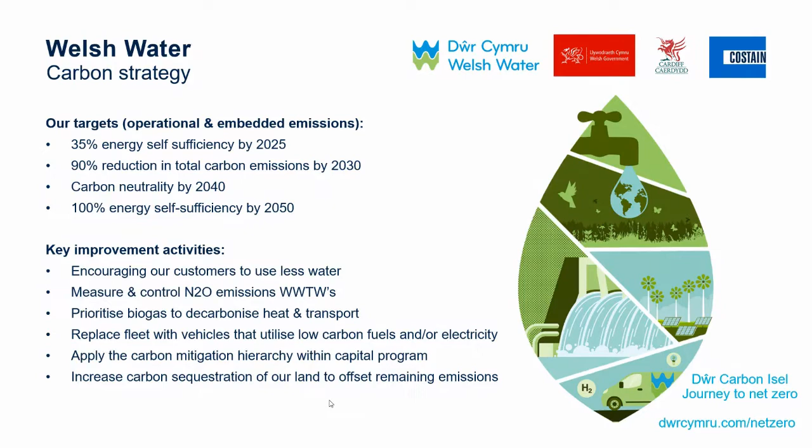For more information on our carbon strategy, head over to our Welsh Water site at dwrcymru.com/netzero, where you can find more information on how we plan to tackle our emissions. Can you move over to the next slide?

Within our journey to net zero, we have a couple of key strategic principles, building on all the work we've done to date, which has achieved a 65% reduction in our total carbon emissions since 2010.

Firstly, we want to continue the good work we've already been doing on reducing energy consumption, increasing self-generation, and sourcing remaining electricity from Welsh-based renewable generators, particularly ones that are REGO-backed and from a credible source. Secondly, prioritize the use of sewage-derived biogas to decarbonise heat and transport, rather than using it to generate renewable electricity, as it has a 5 times larger decarbonisation impact by 2030.

Now the grid is continuing to decarbonise, we'll gradually replace the existing fleet with vehicles that use either hydrogen, biomethane, and/or electricity. We'll actively control and reduce the fugitive emissions, and we'll need to monitor and reduce the emissions associated with construction activities, which is significant. Welsh Water spends over a 5-year period about £1.5 billion, and a large portion of that is in concrete and steel structures, which have a large carbon emission associated with them.

And then lastly, maximizing the carbon sequestration potential and biodiversity of our land holdings. We're a large landowner in Wales, and we can do more as a company to improve the level of carbon that is removed from the atmosphere from those land holdings, and improve the biodiversity in those areas.

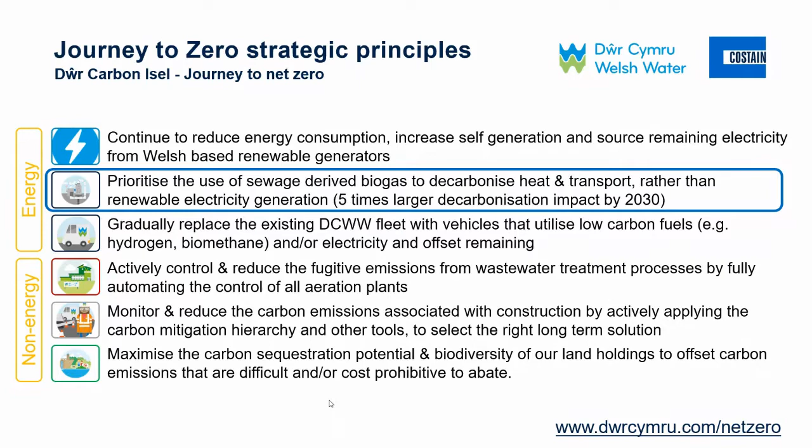We move on to the next slide.

So we worked, probably 18 months to 2 years ago now, with the HyCymru Wales Hydrogen Trade Association. We had a meeting with all kinds of original equipment manufacturers and other stakeholders, and we discussed what we would be able to generate, how much hydrogen we possibly could generate from 35 gigawatt hours of biogas. This is the amount of biogas that was available at that time, and we couldn't utilize the full adequate sludge capacity within one of our treatment works. That was the number which we used to initially conceptualize the idea.

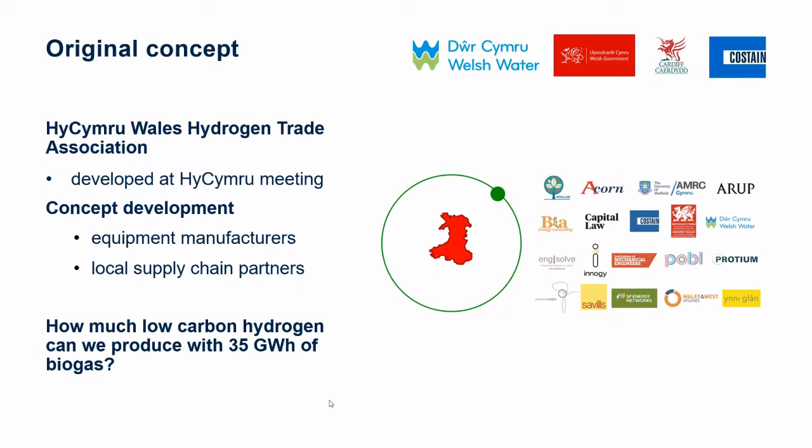And we worked, as said, with original equipment manufacturers like Biotech, Nanosun, and a couple of other companies, but also local supply chain partners to develop this idea further, which also then was supported by Costain and other partners. Move over to the next slide.

So this meeting then turned out to be surprisingly coming out with a larger volume than we thought we would get from 35 gigawatt hours of gas. And we ended up, instead of discussing it initially at one of our sites close to Dinas Powys, relocating the idea to our Cardiff East wastewater treatment works, which treats adequate wastewater for over 1 million population equivalent, and is our largest power consumer within our company.

And using that 35 gigawatt hours of biogas, we came up with the number that we could generate up to 2 tons, or 2,000 kilograms a day, of green hydrogen by using a steam reformation technology. By implementing that at Cardiff wastewater treatment works, we would be able to generate enough hydrogen suitable to supply 100 buses or similar every day.

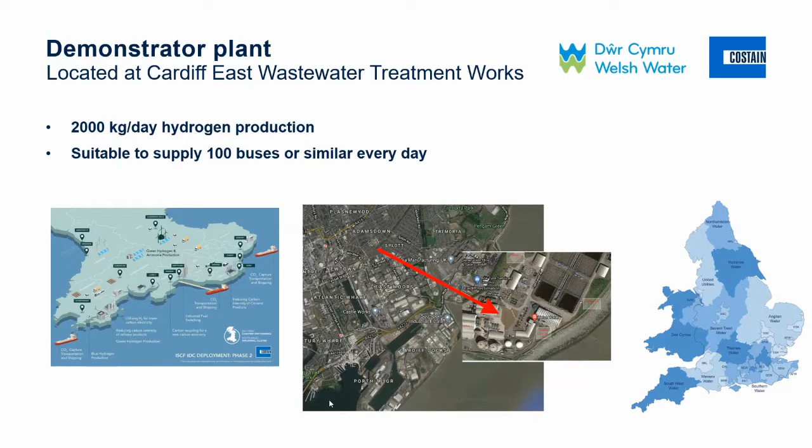And due to the quite good location of the treatment works being in the docks area, quite close to the Viridor waste incinerator, and quite close to the Lamby Way refuse collection vehicle depot, we started to talk with Cardiff Council, particularly on looking at this from a decarbonising refuse collection vehicles angle, but also to enable bus decarbonisation and other forms of transport, including Welsh Water's HGV fleet, which actually ferries sludge around to be treated at the treatment works. So that location at Cardiff is a really good kind of central location.

Now, if you look at the net benefits of this commercial scale demonstrator, we could save well over 9,000 tons of CO2 equivalent, and that is not far off the total transport emissions which we report in scope 1 and scope 3 within our business. So this single investment would make Welsh Water's transport almost virtually net zero. That's a significant impact.

But not only that, we believe that the introduction of using hydrogen to power fuel cell electric vehicles could also reduce a significant amount of PM10s out of the local atmosphere and significantly improve air quality, with close to 140 kilograms per year of PM10 being removed as a result of this project. We also think that it will attract green jobs and attract new businesses to the area and make Wales potentially a hydrogen pioneer alongside the work which has already been done by University of South Wales with their hydrogen centre close to Baglan near Port Talbot.

But there is also potential for rollout of this technology to other Welsh Water sites where we also have advanced anaerobic digestion processes, like the ones near Port Talbot at the Afan treatment works, Cog Moors near Dinas Powys, but also up in North Wales in Wrexham at our Five Fords wastewater treatment works facility.

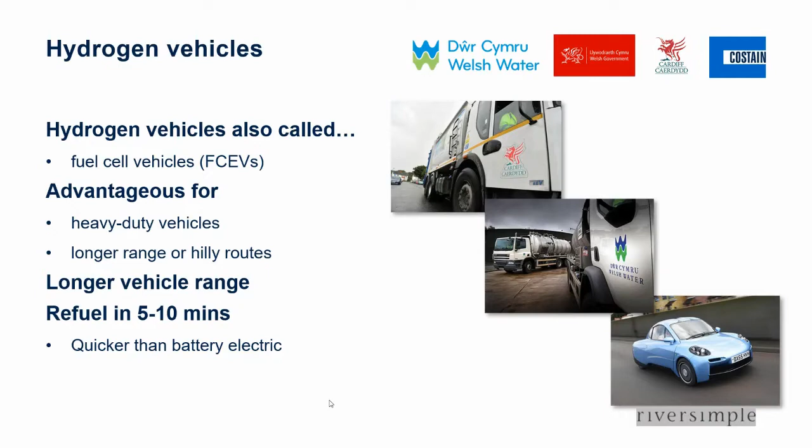Move on to the next one, Gareth.

So, but there also are some key cost challenges. We believe that building the hydrogen facility, which I just suggested at Cardiff, that produces about 2 tons a day or 2,000 kilograms per day or 700 tons per year, enough for 100 buses, is actually commercially viable from the outset and requires relatively little or no subsidies.

What is the challenge here is actually securing the demand for the investment. We in Welsh Water generally tend to work with an investment window for this type of stuff between 5 to 10 years. And we believe we can do that as long as the demand is there. Currently there is not enough demand to justify the investment in the facility.

So what we also tend to do with this project is to stimulate and try to get the supply up and running. And in that, there are some significant cost challenges, because the cost of supplying a hydrogen vehicle is significantly higher than currently an equivalent diesel vehicle.

So it will have higher investment cost that needs to be covered. But the good thing over time is that the operating cost should be lower, and there's also a longer vehicle life expected. So if you do an assessment across the whole life cycle of the vehicle, you should see a significant benefit by going towards this new low carbon technology.

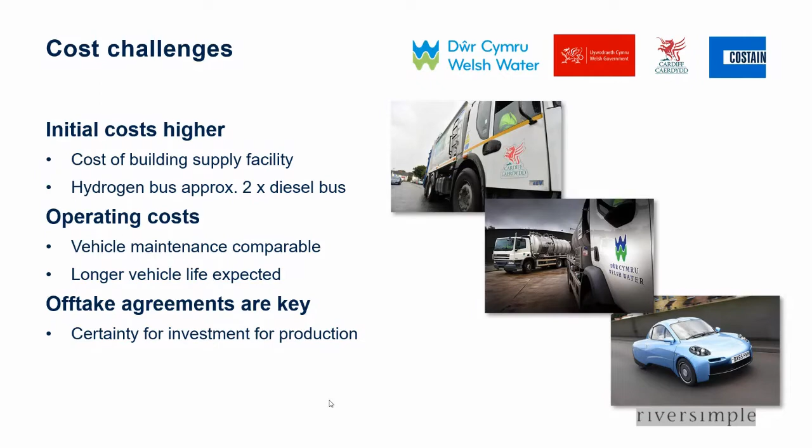But yeah, as Ben was saying, the costs of the vehicles initially are higher, but the operating costs are largely expected to be similar. So with some initial funding to subsidise the initial costs of the vehicles, we feel... like there, Ben. Oh, hello, you're there. Yeah, I'm there still.

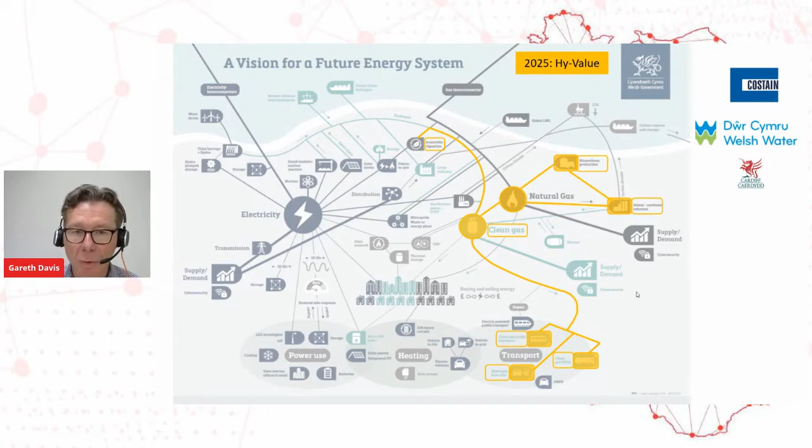So if we just go to the next slide, you can see that by 2025, we think that HyValue, if we're producing hydrogen from biogas and biomethane to provide hydrogen for transport, would cover already quite a significant part of that energy system. And if you look further forward 10 years to blending gas on the gas network, which is currently quite widely expected to happen, then by 2035, you can see the reach of the project, the influence of the project is really quite significant.

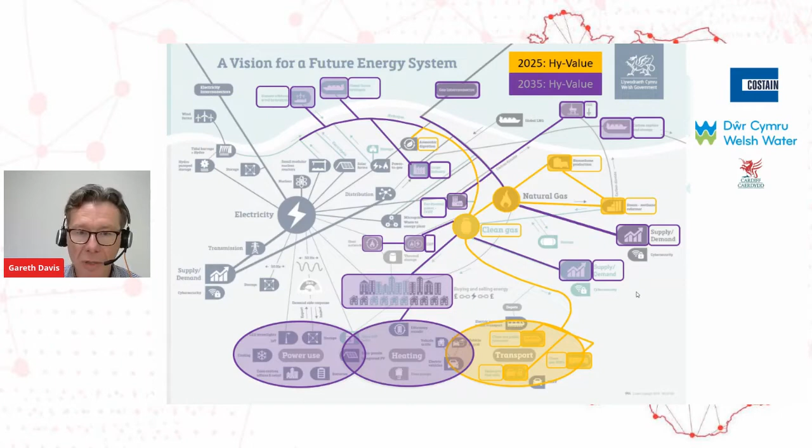And this could be for South Wales, for Wales as a whole, or for the UK. So this is really an important project, potentially, in getting the hydrogen economy kick-started to make a contribution to decarbonisation and to local air quality.

There have been consultations and ambitions published by Welsh Government regarding decarbonisation, and a specific one we picked up in doing this project, because we're looking at transport, was that there's an ambition to have 200 fuel cell electric vehicles. Those are buses basically that are fueled by hydrogen by 2030.

Now that would have an additional cost of around £45 million, because each of those units costs about £225,000 extra compared to a diesel bus. But as the economy is established, the cost of the bus is expected to fall dramatically, and this is a very meaningful way to go about decarbonisation, because buses, particularly those with longer routes, are really well suited to hydrogen.

There's also a high level requirement to think about the infrastructure planning for hydrogen alongside battery electric. A lot of the news is about battery electric at the moment for vehicles, and obviously it is a number of years, 3 or 4 years ahead of hydrogen as a technology, and starting to become mainstream.

But we'd just like to highlight that considering hydrogen now and developing it alongside battery electric means that things that don't seem a problem now won't come to light later. So for instance, if you're converting a fleet to battery electric at the moment, converting only a few vehicles probably wouldn't give you a problem with your electrical connection to the grid, but doing so in the future, when you want to convert the whole fleet to battery electric, could leave you with much bigger costs in terms of bolstering your connection to the electric grid, and could make investments further into the future look really quite unattractive compared to how they look now.

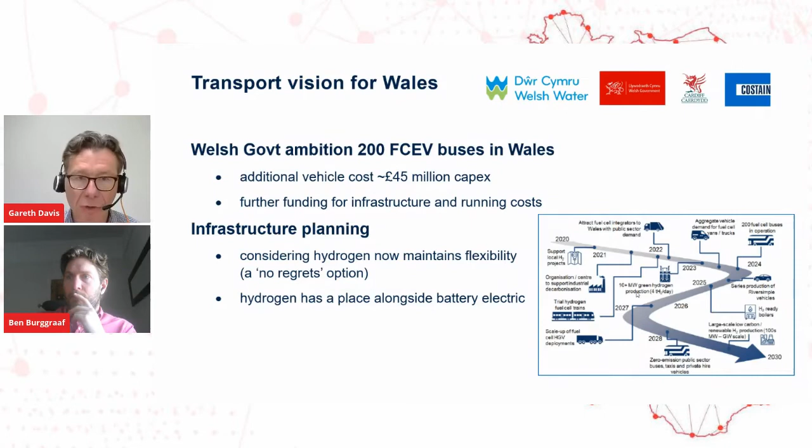So to move to the HyValue scheme, and I'm just aware of time, we're going to have to skim through this quite quickly, but we came up with the strap line, making your poo work for you, and we really like the idea that the waste biogas from the sewage treatment works could produce hydrogen, and as you'll see later on, could be used to fuel the City of Cardiff's vehicles from the local fleet of the Cardiff Council.

Hydrogen's really a good fuel for being an ultra low emission form of transport, because that will make an improvement on public health by having no particulate matter and lower NOx by using fuel cell vehicles.

So we decided we would look initially at refueling primarily for fleet vehicles, but also private vehicles, and come up with a scheme that could basically handle 2,000 kilograms a day of the hydrogen produced from the 35 gigawatt hours a year of biogas that Ben highlighted initially. So 2,000 kilograms a day is roughly enough for 100 buses to operate daily, so it's quite a significant amount this facility could provide.

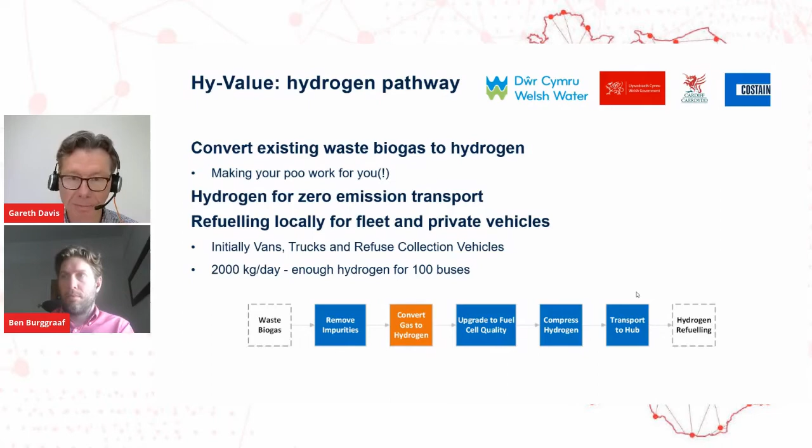I think Ben's already covered this on some of the benefits, but you can see there's a benefit on decarbonisation in terms of reducing CO2 for climate change, and there's a benefit on air quality in terms of the PM10 reduced.

Ben, maybe you'd just like to chip in on this one?

Can you hear me again, Gareth? I'm back again, I can hear you. Good, yeah, I'm more than happy to chip in.

We're looking at the steam reforming of biomethane in this case. Biomethane is made by separating the CO2 from the biogas, and then steam reforming, which also expels CO2. But this CO2 is biogenic because it's short cycle and derived from waste materials, like sewage sludge, which is different to the steam reformation of natural gas, where you're using fossil fuels to decarbonize. We currently inject biomethane to the grid at our Five Fords facility, which has been classed as green gas, and we get green gas certificates, or renewable gas guarantee of origins, which are also ISCC accredited, one of the European standards for accreditation on renewable gas.

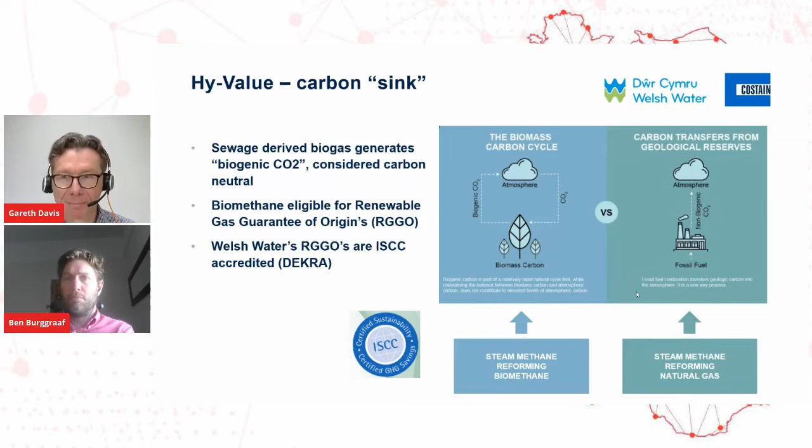A little bit of detail on what the scheme consists of. As Ben said earlier, we've collaborated with technology providers for a range of options for each of these processing steps, which you can see in the diagram at the bottom. We tie in and connect into the existing biogas holder, currently used before generating power at the Cardiff East site, and then we'd upgrade the biogas to remove CO2, water, and other trace components such as sulfurous compounds which could affect the processing. That biomethane then feeds into a modular SMR, a steam methane reformer unit, which would produce 2,000 kilograms a day of hydrogen.

We then produce that hydrogen and store it locally, before using a novel technique to distribute it, from a company called NanoSun, which could enable us to establish more than one fueling facility. It's quite a nice idea - a mobile library type approach, where we could have a facility that visits different areas around South East Wales and South Wales, providing hydrogen on different days of the week.

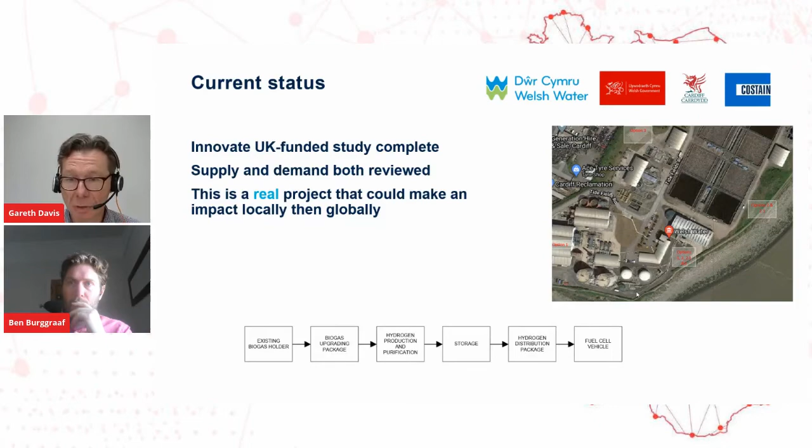In terms of the current status of the project, we've produced a concept design, with a capital cost and an overall program for what a project might look like to fully engineer, design, and construct this facility. We've gone through a feasibility study, part funded by Innovate UK, looking at both the supply and demand side, including the demand side with Cardiff Council. Significantly, this is a real project - there's a lot of movement in the hydrogen space at the moment, a lot of reviews and assessments of what the best thing to do is, but this is actually a real project. Boris Johnson used the term 'oven-ready project' recently, which has become a bit of a buzzword, meaning it's a project that's just ready for investment - viable economically and technically, and we're looking to move it forward as quickly as we possibly can.

Having achieved that financial and technical feasibility, we started to think more deeply about the demand side of hydrogen. Cardiff Council were a really key stakeholder in the initial phase of looking at the HyValue facility, and along with Welsh Water, identified that looking at hydrogen supply and demand at the same time is really key to making progress. A lot of people talk about the chicken and egg problem - you don't get spend on infrastructure because not enough people are buying hydrogen vehicles, and vice versa, people don't buy hydrogen vehicles because there's no nearby supply. So addressing both at the same time was seen as key for this project and for pilots going into the future. We got some good publicity from the BBC website too, which helped promote and highlight what a good project and proposition it is.

Cardiff Council supported us to do a demand assessment, which Costain undertook, looking at overall demand for hydrogen, looking at total cost of ownership, and also funding and procurement options on the demand side. So that means for vehicles, for the infrastructure to provide refueling. So we're now starting to have some joined up thinking, looking at the whole thing as an energy system. If we think back to that initial energy diagram from Welsh Government, a lot of this is about joined up thinking about an integrated system.

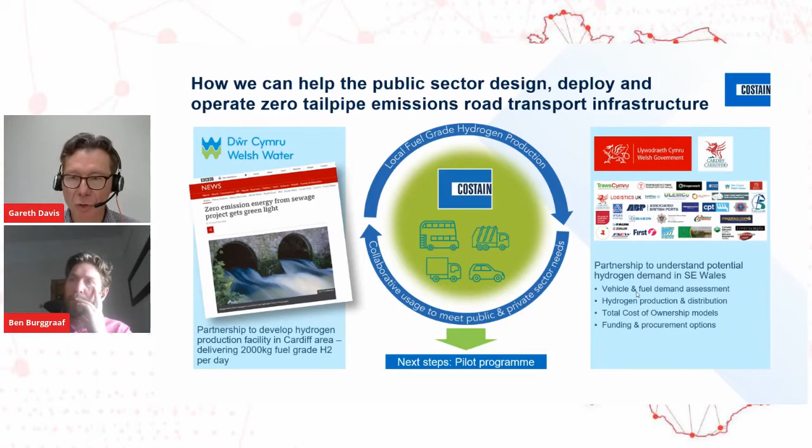So we've just finished producing this report, looking at the feasibility of this low carbon pathway, which is using the renewable biogas available from Dŵr Cymru. We've included a financial assessment of the overall cost of vehicles, and we've identified the customer base and the overall market viability of it. So some of the specific tests we undertook were mapping the potential demand for hydrogen, mainly from fleets.

So we primarily looked at local authority, but we've also spoken to bus operators, we've also spoken to emergency response vehicles, and we've come up with dozens of interviews, online questionnaires, considering different people's opinions, and coming up with a range of scenarios of how much hydrogen could be conceivably consumed in the South East Wales area over the next 10 years.

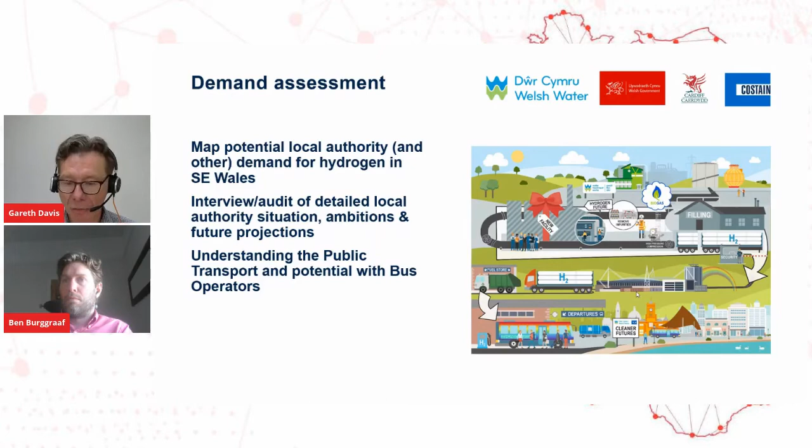As you can see there, we talked to all sorts of different people, ranging from bus companies such as TrawsCymru, First Group and Stagecoach. We talked to University of South Wales, who were key because they were looking to support us through the HyValue project. You can see we've got a range of not just bus companies, taxi companies, all the emergency response companies, fire and rescue, police. So we spoke to a wide range of people, most of them with a fleet operation.

One of the attractions of fleets is obviously you can talk to relatively few people, but have the influence over a relatively large number of vehicles. So we developed 3 scenarios. I won't go through them in too much detail, but obviously they were varying in levels of optimism, from scenario 1, where there's pretty free funding and availability of hydrogen or fuel cell electric vehicles, FCEVs, down to scenario 3, which is a less optimistic but perhaps more pragmatic view of how things might develop.

Interestingly, with the work, we expected to find quite a lot of potential use from buses, and we saw bus companies expecting somewhere between 40 and 50% of buses in future to be powered by hydrogen. We saw refuse collection vehicles, bin lorries - you can see in the middle picture there - they were a very strong case for conversion to hydrogen because of the power use, because of all the hydraulic equipment on board the vehicle, and also the fact that you tend to want a long shift pattern and don't want to be charging a battery electric bin lorry for a number of hours during the day. You want them out on the road.

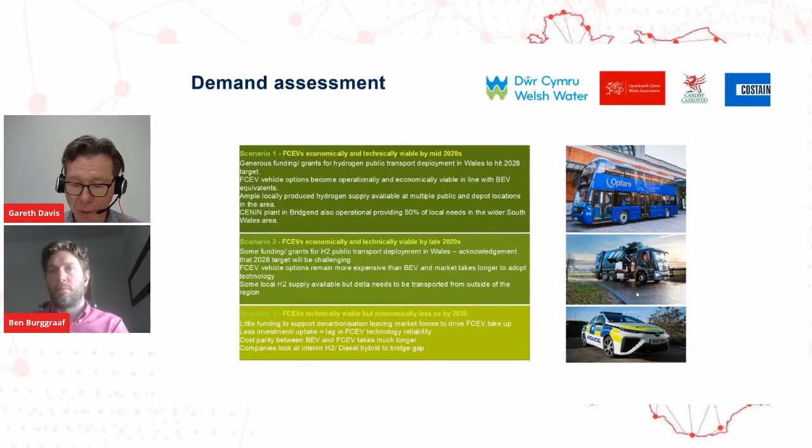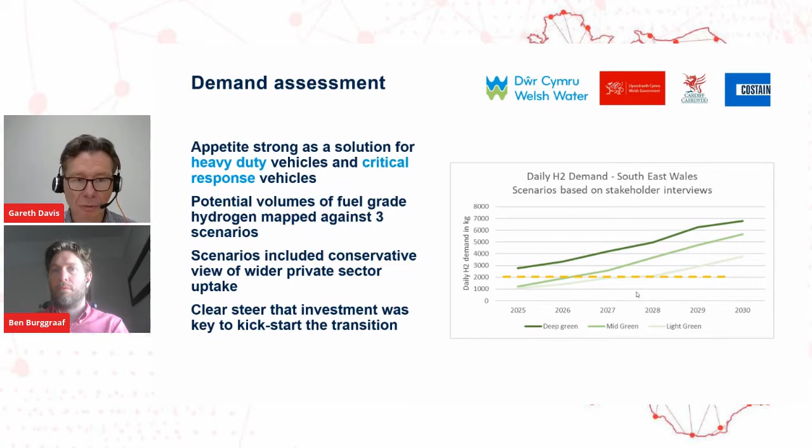So the conclusions of that report were that the hydrogen supply scheme has been shown to be viable technically and financially, and we've shown some benefits of the potential for hydrogen demand in South Wales through actively talking to the operators of fleets in the area. And there's proven that there really is a need to develop hydrogen alongside battery electric, both from the supply side and demand and refueling side.

And obviously funding for this is going to be absolutely critical. And I'll just pass back over to Ben, maybe to talk through the overview of how we see things going in the subsequent years.

So I think this slide provides a good overview of what we're planning to do next. Hopefully you can still hear me, so there's a bit of a glitch.

We currently have undertaken a feasibility study. We've also had conversations with stakeholders on the design of a trial, and we have been engaging quite heavily with fleet managers, as Gareth already has been indicating. But I think what it really shows is that this kind of project cannot be a standalone project. We cannot look at the production of hydrogen on a standalone basis. We need to look alongside the demand in order to secure further investment in this particular area.

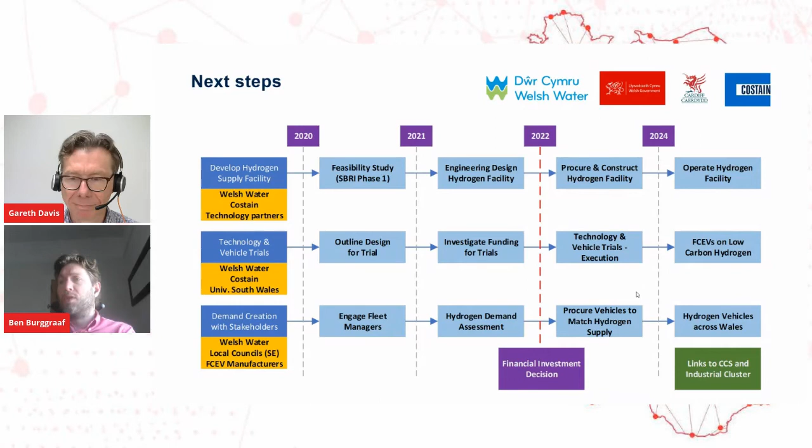And that means that we can make a big impact now. And what climate change really demands, and the climate emergency, is that we make an impact now. And we believe that this project could have a significant impact on decarbonisation within the South Wales region now, rather than by 2030. And I think it's a great showcase of what is possible if we all put our heads together and all move in the same direction.

And we as Welsh Water, we're keen to make that advancement, but we need to have support from all people around us in order to make this happen. And I think that's the end of our presentation, Gareth, isn't it?

Yes, it is. You have anything else to add? No, thanks very much. I think it's just been really quite an exciting project to be involved with, and I think the fact that we've looked at both sides, looked at the hydrogen supply and the demand together, is absolutely key for getting the joined up thinking that's needed to really move things forward and actually build something that's going to physically make a difference for climate change and for air quality.

Okay, I think we have some time for any questions, if there are any questions.

See if there's any questions being raised via the comment box. Let's have a look and scroll through there. Some good feedback on the presentation. Let's just go to the top. Read through and we'll go.